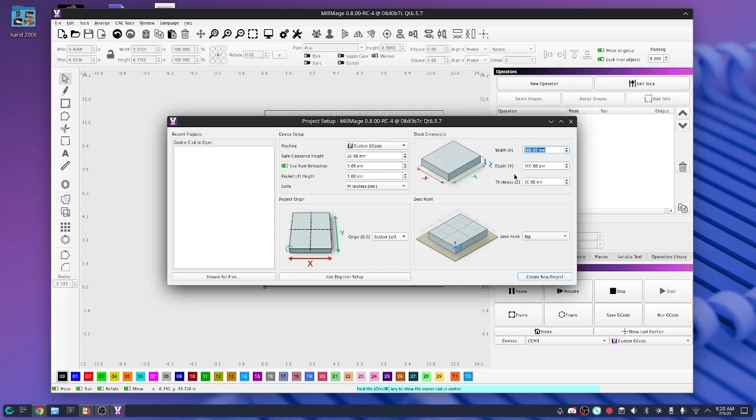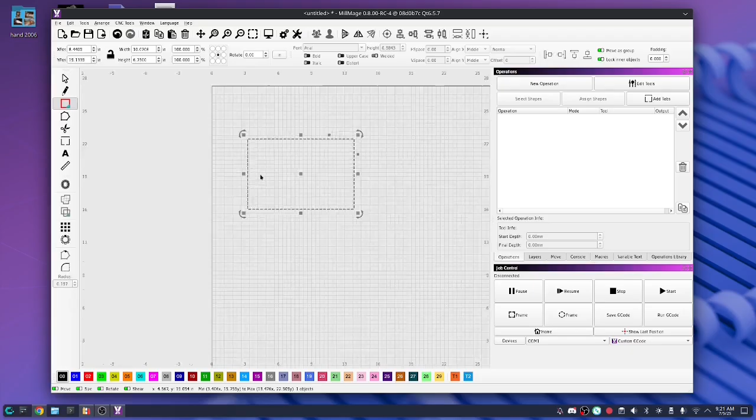When we start up Millmage, you can see we are presented with our material setup. So I'm just going to enter the dimensions of my material. I'm just going to draw out a couple of rectangles. I'm going to make this about 6 3/4 inches tall. This is going to be for the inside cavity of a tray. I want the height to be 6 3/4 inches, so I'll just eyeball the rest of it. I'm going to do an offset and just stretch it out to give us a nice border.

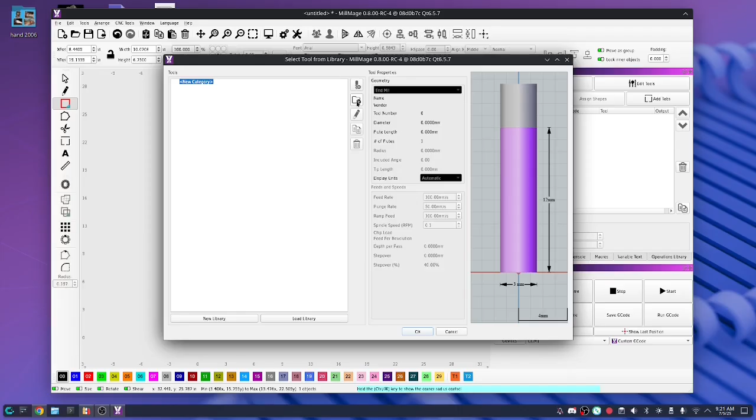Inside of Millmage, we need to create a new operation. We're going to use a pocket. I gotta assign a tool. I don't have any tools in here yet, any bits. So the first thing I need to do is create a category. New category. I'm just going to call it InMill. I hit enter, and inside of that category we're going to add a new bit.

The dimensions of this bit is going to be for the hog, so it's a 1/4 inch bit, so I'm just going to put 0.25 in and hit inches, and it'll automatically convert that to metric, which is fine. It's a 2 flute bit, and we got to set our feed rate on this bit.

So to get the suggested feed rate, here's the IDC Woodcraft website where you can get the beast and the hog in a combo kit. But if we scroll down here, you can see we have a specs and settings section. Specs and settings is going to be for the hog. You see the feed rate. The suggested feed rate is 80 inches per minute.

Now I'm also running LightBurn on Linux. Millmage is running on Linux, so LightBurn after 2.0 will run on Linux as well, using the same method. But in LightBurn, you can go to the units and grids, set the measurements for inches per minute.

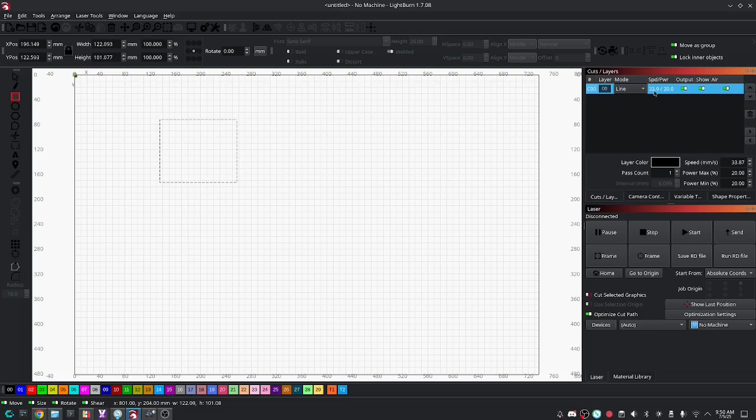Then when we go back into our units menu, using the units and grids tab, we can do millimeters per second. Hit OK, and that's our little calculator there. You see it's 33.9. You open that up, you see it's actually 33.87. And in gSender, we can move that up and down a little bit on the fly, so I'm just gonna put in 34, round that up, and there's our first bit.

We got to set the final depth. I'm using 10 millimeters here, probably might end up changing that, and then we have to set our depth per pass. The beast says it can do 3/4 inches, but I never run it that hard, so I'm just going to leave it at 4 millimeters. Now we need to set the speed. I don't have a spindle, I use a router, so it really don't matter what I put in here. I type in 10,000, that's just an arbitrary number.

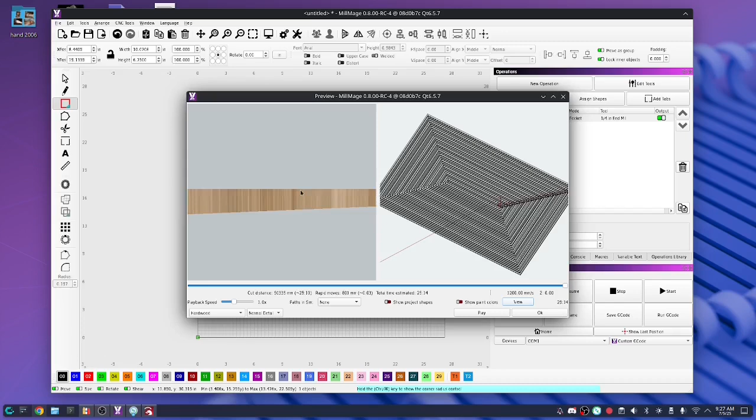And we can do a preview and see that pocket might not be quite deep enough. So I'll just go in and make that just a little bit deeper. The material was 19 millimeters thick, so I'll just move this on up to 12 millimeters on this pocket, maybe 14. See what that looks like in a minute.

Then we got to do a profile, so I'll add a new operation for a profile. This one, we want to do the full depth, which is 19 millimeters, and I'll do probably 5 millimeters, 6 millimeters. Let's set that to 5. I'll do 5 millimeters per pass. I want to make sure I cut on the outside of that line. And then I'll set my RPM speed. Again, 10,000 doesn't really matter.

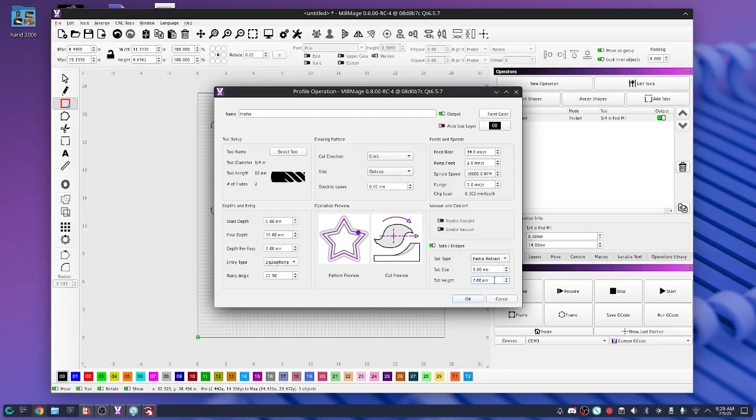Hit OK. Oh yeah, I want to add some tabs. I'll enable the tabs, and I want to do partial height. I'll probably make it about 7 millimeters tall on the tabs. That'll probably be plenty to hold it. Then I need to add the tabs to the project. See, we have a few settings here, but I'm just going to flip this button and have a maximum of 8 tabs, 2 tabs per side.

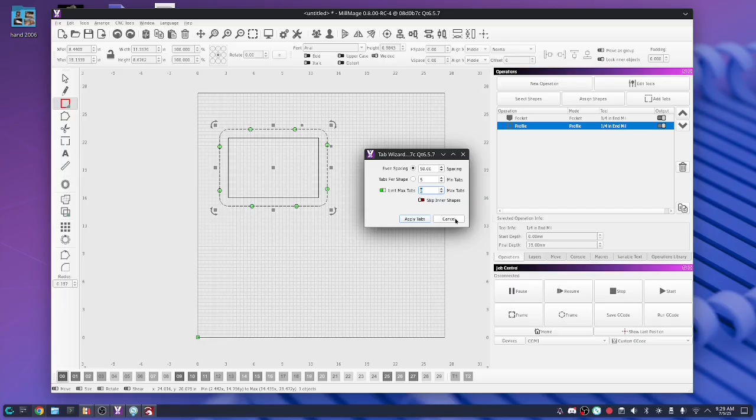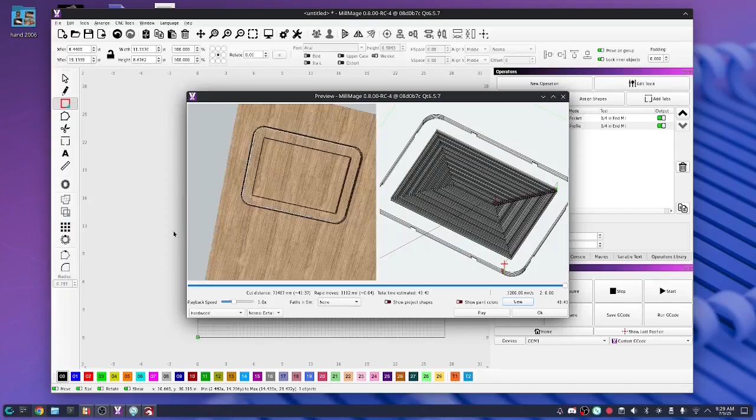Hit apply, and then let's look at that. Preview this job. So after I made my offset, this project's going to end up being 8.6 inches tall and 11.997 inches wide. So about almost 8 3/4 by 12. So this will make a good little sandwich board.

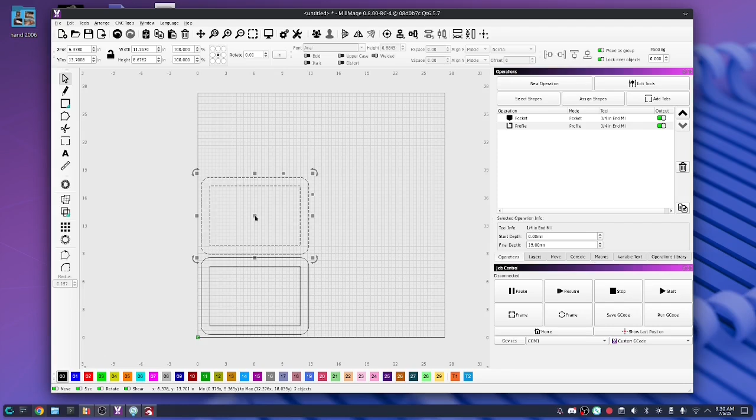Now I'm going to set this down in the bottom corner of the material. We're going to Control D and duplicate this a few times. Control D once again. Then I'll select all 3 of these, and I'll Control D and scoot them over to the side. This will give us 6 sandwich boards. And as you can see, only one of them is being cut out when we do our preview.

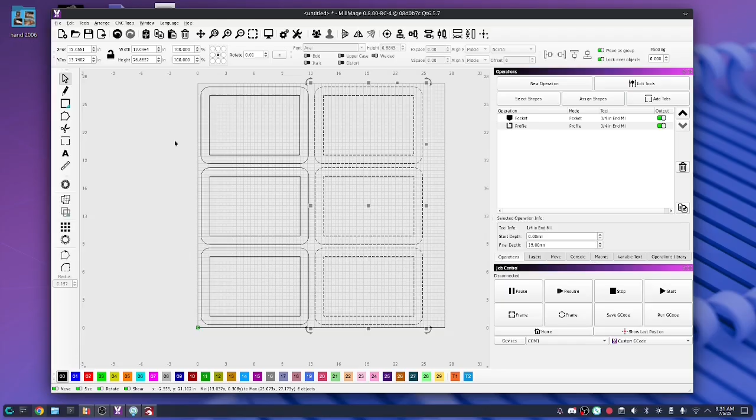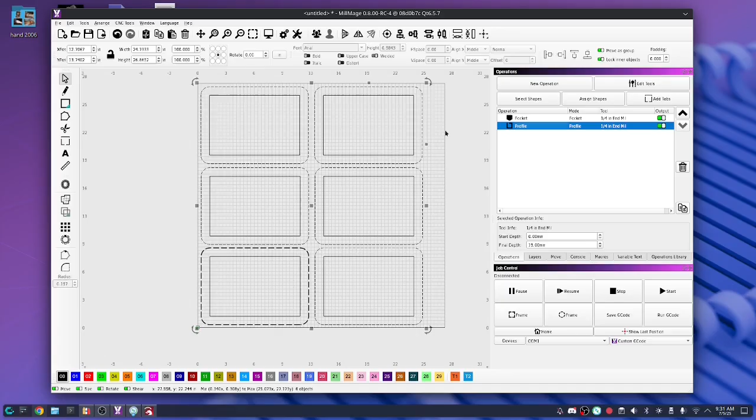So I'll have to go in here and select my pocket path, and I'll select all of these vectors on the inside of my project, and I'll assign the shapes to that toolpath. I'll do the same thing with the profile. I'll select all of my profiles, hold Shift key, click on the profile, and assign shapes. And as you can see, now all my sandwich boards are being cut out.

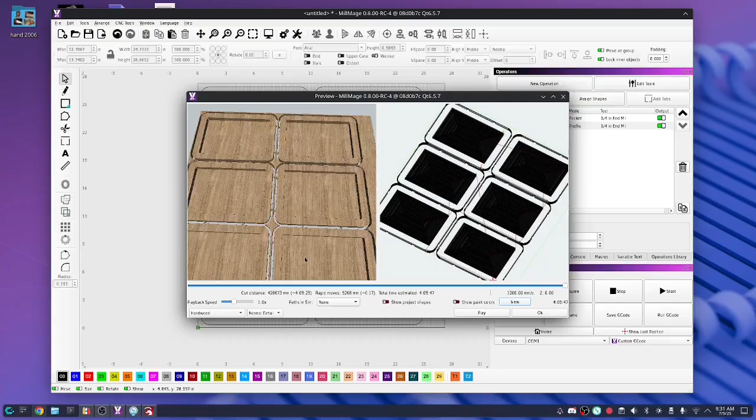So it's pretty much that simple to create a sandwich board or a catch-all tray or anything like that in MillMage. I will be laser engraving the inside of these trays once they're done cutting out on the CNC. I don't have a laser on my CNC, so this will be a different machine. What I'm going to do is just export these to an SVG, give it a name, hit save.

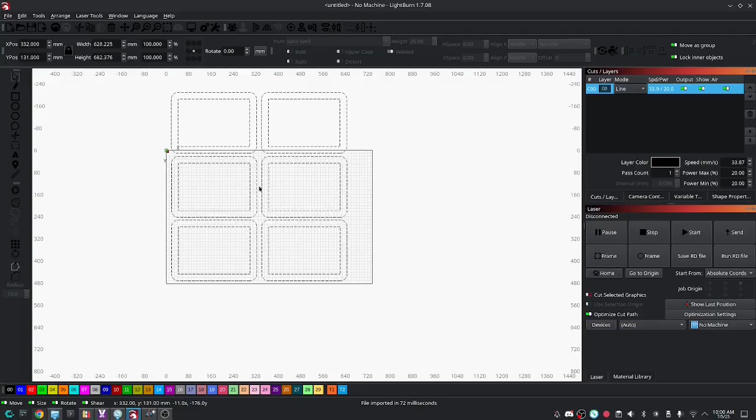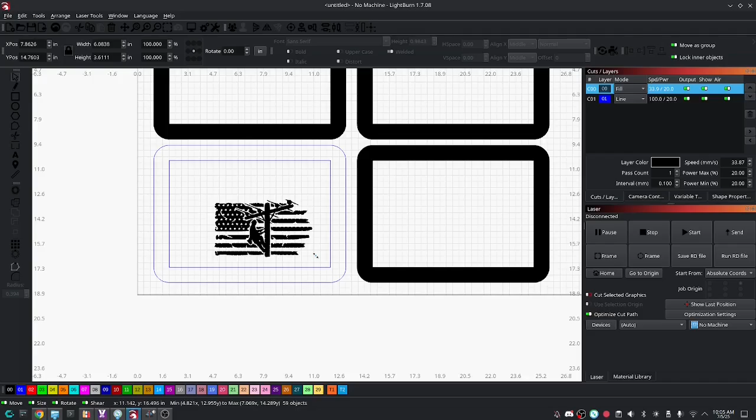And then I'll bring it into LightBurn here. You see my CNC is a lot bigger than my laser. This is set up for my CO2 laser here. I'm going to bring in this little flag right here, this lineman flag. When you're in LightBurn, you got to hold Control to select your vectors that are being filled. I'm just going to put the tray vectors on a different layer.

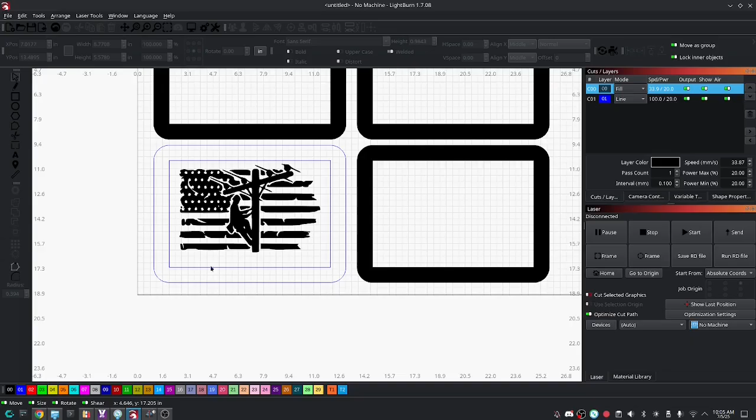I'll size this flag up to fit the tray. Center it up, then I'll hold my Shift key and drag it up just a little bit. That'll give me a little room at the bottom to put a name or something. I'll be doing these one at a time, so I don't need the rest of these vectors.

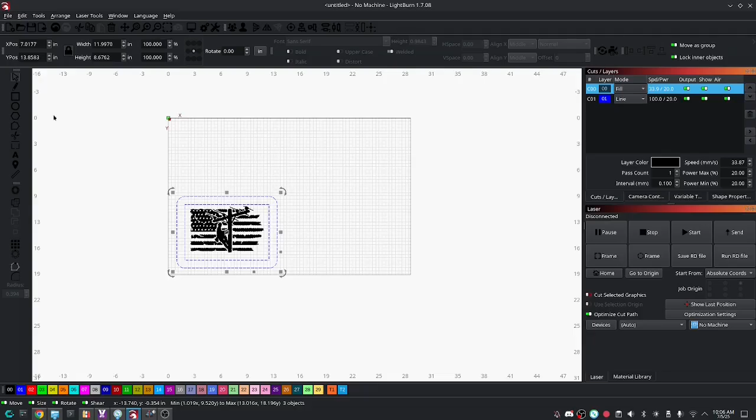I'm wondering right here if I couldn't have made a jig out of the cutoffs in Millmage. Look at our preview. If I had planned that out, spaced that out a little bit better, I probably could have made a jig out of the cutoffs and at least done 2 at a time, but that's okay. We'll just go ahead and do them 1 at a time. They'll run pretty fast.

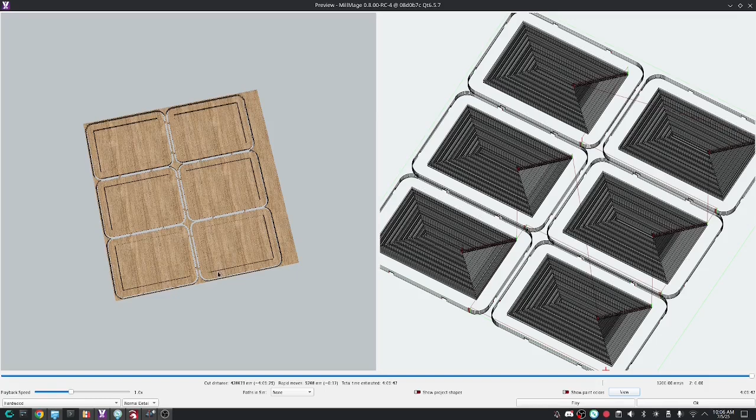I'm going to move this to the edge of the honeycomb bed on my CO2 laser. I'll find the center of the material, and then I'll put this on current position. It comes up to absolute coordinates. I'll move that to current position, and I'll select the center origin. So when I find the center of my material, I can set the laser to that point, and that's how I will line up that graphic right there. And that'll be pretty much the end of it.

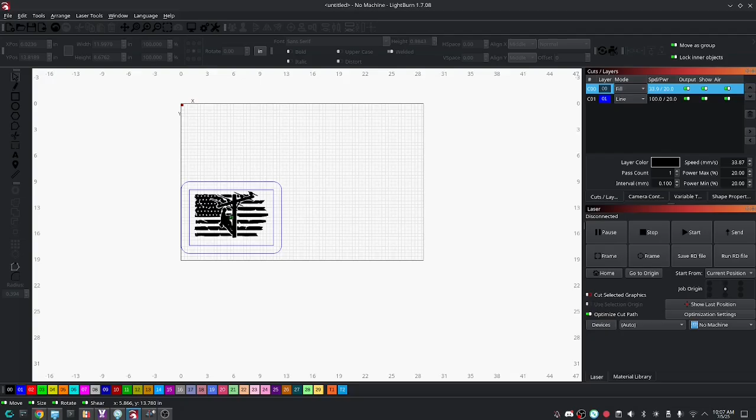So the point of this video is to show that Millmage and LightBurn both will work on Linux. I know LightBurn is not supposed to work on Linux after the 1.7 family is over, but through this method it will work on Linux using Bottles, which is a Wine-based application. So at least it'll work anyway. That's the whole point of it.

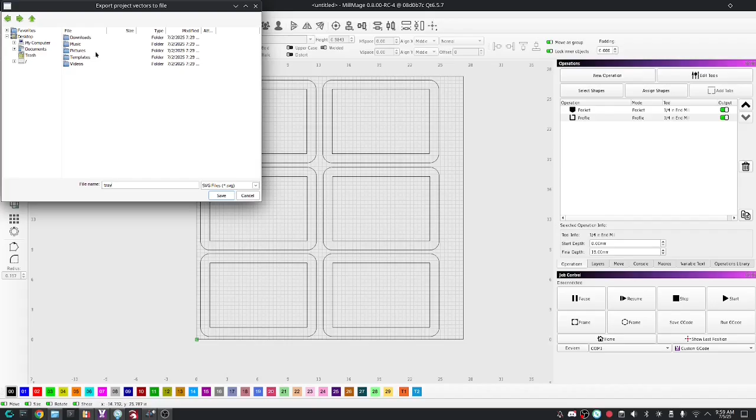Just testing out Millmage for the first time for simple vectors and stuff like this. I think it'll be pretty good. They'll be adding features pretty quick from what I hear. Maybe we'll get some 3D relief ability pretty soon, but we'll have to wait and see about that. So here's Millmage working on Linux.